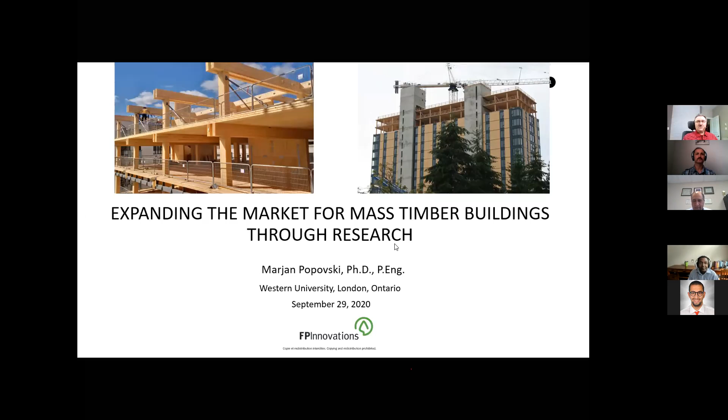Thank you so much for the kind introduction. Good afternoon, everybody. My talk today will be related to expanding the market for mass timber buildings through research. What I will try to do is basically explain what research we are doing related to wood buildings in general at FPInnovations.

First of all, probably all of you are not familiar with FPInnovations. FPInnovations is Canada's Forest Products Research Institute. It's a private non-profit institute that specializes in creation of solutions in support of the Canadian forest sector's global competitiveness. It's a Canadian public-private partnership between the federal government, provinces and territories in Canada, and industry members. We have approximately 450 employees and around 170 industry members. We have 3 main laboratories in Vancouver, Montreal, and Quebec City, and our research budget is around $65 million a year.

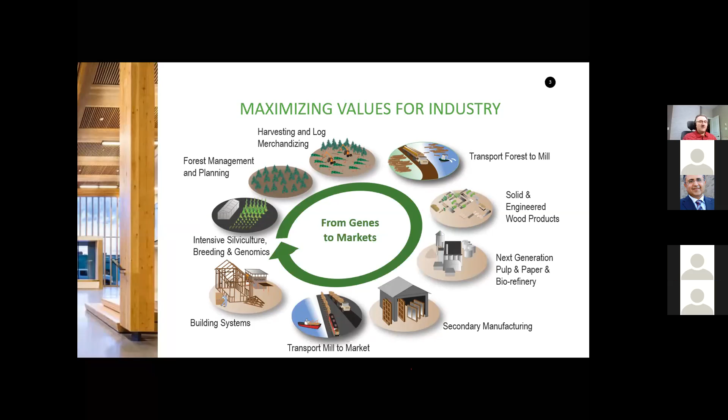We basically provide optimized solutions to maximize the values from the industry, all the way starting from intensive silviculture, then forest managing, to processing, transportation, primary and secondary manufacturing of wood products, all the way to the building systems. Because most of the wood products that are produced end up one way or the other in structures and building systems, that's the group that I am in, the building systems group. We're kind of on the top of the food chain in our organization. We basically do lots of collaborative research and development between government, universities, and industry together.

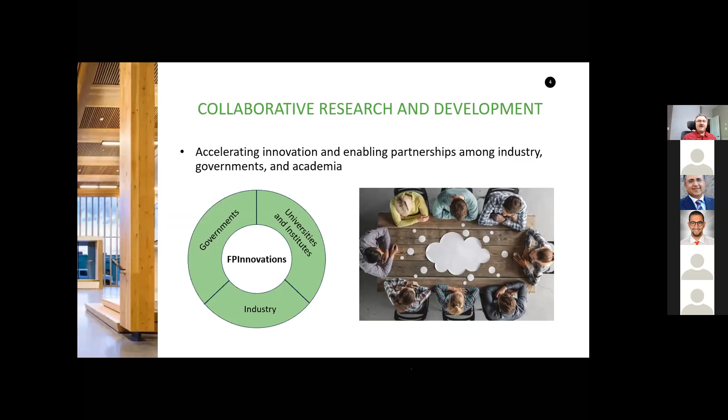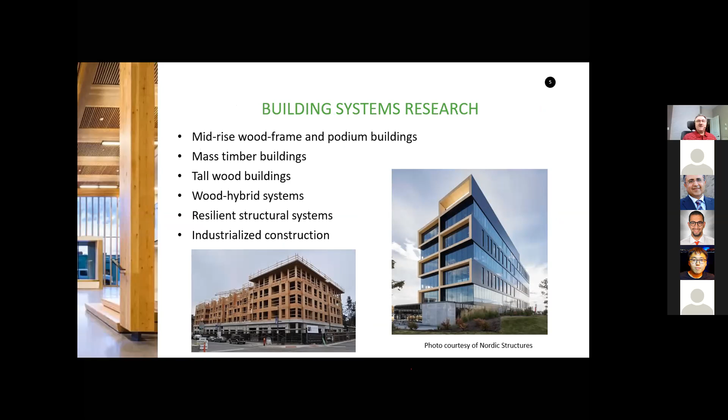In the building systems group, most of the research is related to these main topics: mid-rise wood frame construction on or without podiums, mass timber buildings, tall wood buildings, wood hybrid systems, resilient structural systems, and industrialized construction.

Our group's research follows a multidisciplinary approach. We also take a holistic approach to the solution. So not only does the solution have to be good for structural and seismic performance, but also it has to be good for serviceability performance, for durability and energy efficiency, for fire performance, acoustics, and of course to be a sustainable solution. So we look at the holistic approach when we are doing our research. This might be new to you, but this is probably the only way to go forward, because if we only provide a solution that is only good for structural performance but not good for other performances, then we basically have not done much to introduce that solution in the market and get it accepted in the codes.

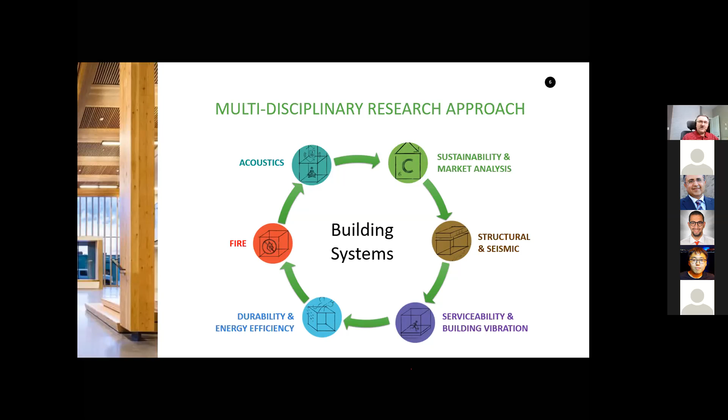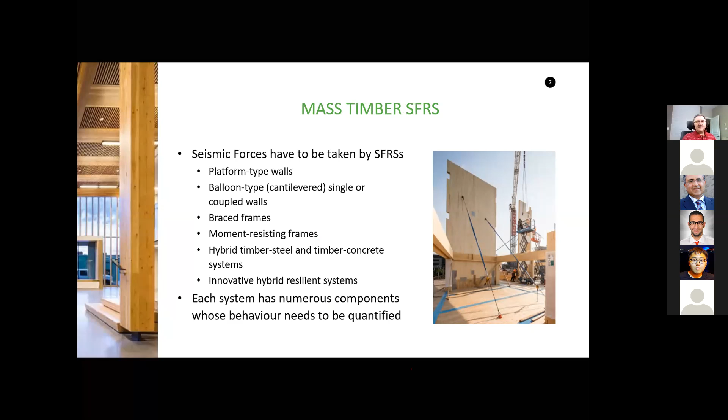So let's start with some of the research that we've done on structural and seismic performance. I'll talk here about mass timber seismic force resisting systems. The seismic forces that are generated on structures have to be taken by the seismic force resisting systems, and we have many such systems in timber structures. For example, platform type mass timber walls, balloon type or cantilevered single or coupled walls, braced timber frames, moment resisting frames, and many different hybrid steel, wood-steel and wood-concrete systems. Finally, we also have innovative hybrid or resilient systems. Each of these systems has numerous components whose behavior needs to be quantified.

So we started our research on mass timber systems, starting with platform type CLT buildings. We did numerous tests, dozens of tests, on 11 different types of CLT walls that can be used in platform type construction. For those not familiar with platform type construction, that's a construction where the height of the wall is basically equal to the story height. You build the walls on the first story, then put the floors on top, then the wall of the second story, then the floor. So the floor at each story serves as a platform for building the next story up.

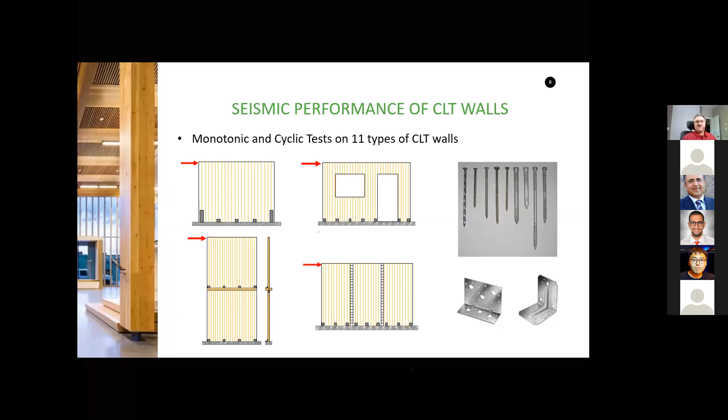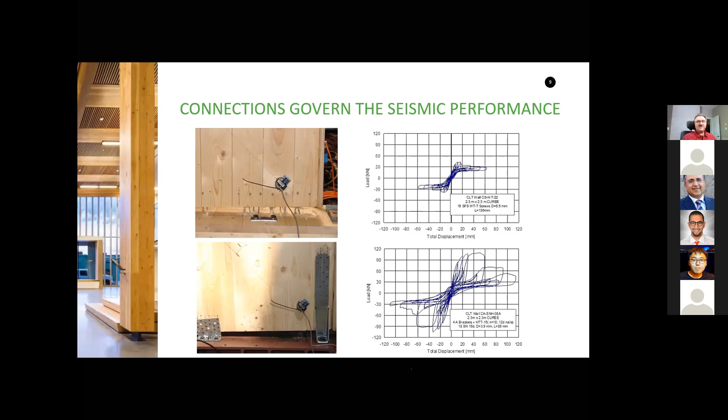What we found out is that connections definitely govern the seismic performance of the walls. For example, if you use a CLT wall with screws connected to the floor below, they can provide a connection with significant stiffness. However, the ductility and energy dissipation of such connection is pretty low. On the other hand, if you use walls with hold downs, the performance of the wall significantly improves in terms of seismic performance and energy dissipation.

We also tested a two-story CLT house, 6 by 4.8 meters in plan. That house was symmetric in one direction and unsymmetric in the other dimension. So we did quasi-static testing in both directions to determine how a 3D structure would perform under lateral loads.

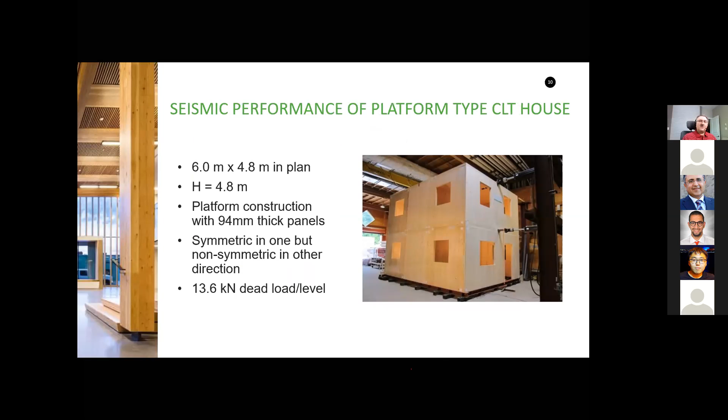And again, lots of findings here—of course every one of these slides could be a presentation on its own. We found that the structure responds with a combination of rocking and sliding deformations. The main deformations were in the lap joints between the CLT panels, in the brackets connecting the walls to the floor, and in the hold downs.

However, the structural integrity was not compromised at failure, and we were able to get up to 3.2% drift at the bottom story. The hysteresis loop on the left shows the performance of the house at the bottom story, and on the right you have the performance of the second floor. As you can see, and as expected, most of the deformation and energy dissipation occurred at the bottom story of the house.

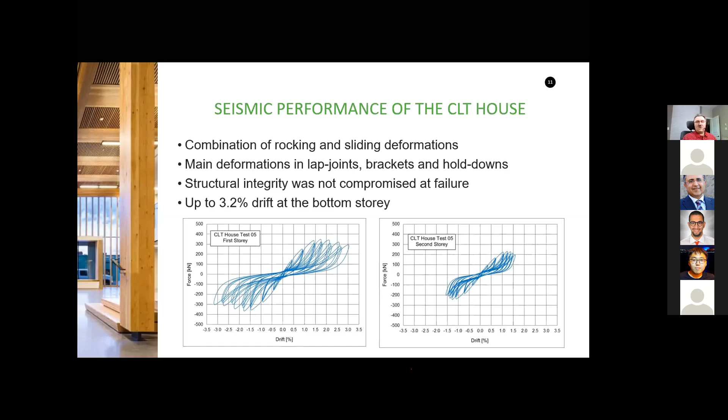The deformation of the CLT house consisted of many different components. We had a global rotation component of the wall on the first and second floor, then a rocking component at each floor, then sliding at each story of the walls, and finally in-plane wall deformation consisting of bending and shear deformation inside the panels themselves.

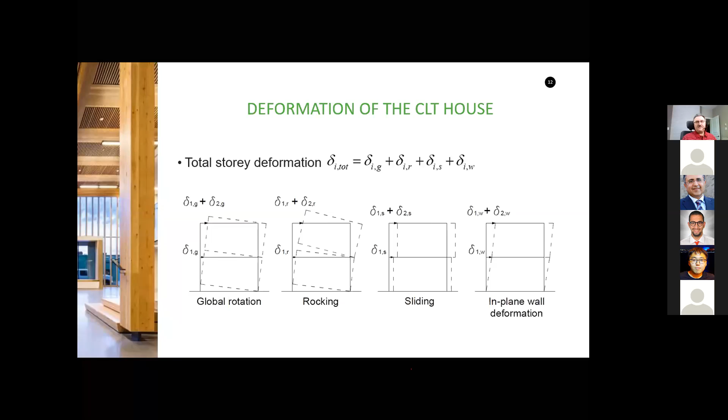Having all of this data from the experimental tests of single walls, the 3D house, and some data available from other researchers, we did a long, comprehensive analytical study to determine the seismic modification factors for platform type CLT buildings for implementation in the National Building Code of Canada, NBCC. So we did the modified FEMA P695 analytical program, done in collaboration with Colorado State University and Texas A&M University.

We developed numerous archetypes for CLT walls in platform type construction with different heights. We also modified the procedure to serve Canadian sites such as Montreal, Vancouver, and Victoria. And of course we chose and scaled different earthquakes coming from 3 different sources: on the West Coast, subduction, crustal, and subcrustal earthquakes, as well as local earthquakes for Montreal.

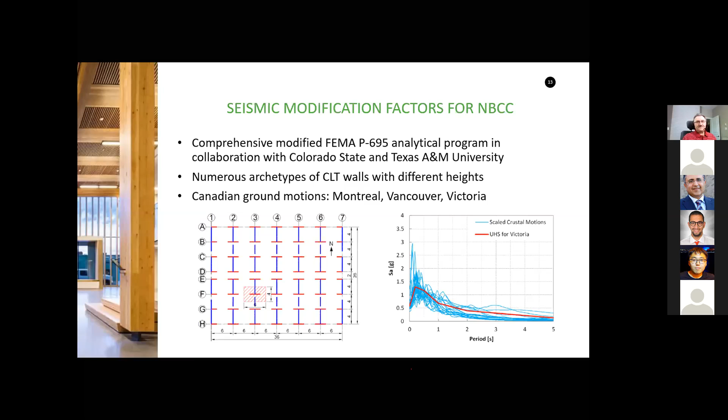And out of all that analysis, which took more than 2 years, we were finally able to introduce platform type CLT walls as a seismic force resisting system in the 2020 National Building Code of Canada, with seismic factors of Rd of 2.0 and Ro of 1.5.

For those not familiar, those R factors quantify the ductility and energy dissipating capability of the wall, of the system. In the National Building Code there's a table with the SFRSs, the seismic force resisting systems, with their R factors for concrete, steel, and wood buildings, as well as masonry buildings.

So we were also able to establish height limits for the system. The height limits are 30 meters for low and moderate seismic zones, and 20 meters in high seismic zones, which will be seismic category 3 and 4 in the 2020 NBCC.

Based on the research that we've done, we also implemented CLT as a system in CSA O86, which is the Canadian standard for engineering design in wood. That was first done in 2016, and then in the 2019 edition we did a significant revision of those clauses based on the research conducted at FPInnovations and other places.

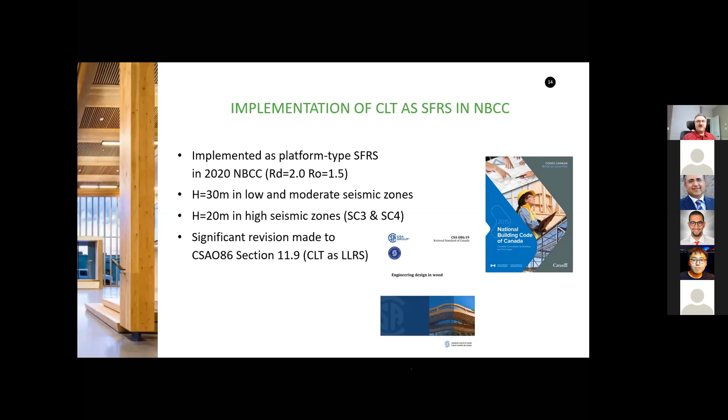Next system we are looking at is brace timber frames. Brace timber frames can be one of the most efficient seismic force resisting systems. They are frequently used in mid-rise and tall buildings because they provide high stiffness for the building. However, the ductility of the brace system can sometimes be limited.

You have examples there of brace frames being used in real buildings, in UBC's Earth Science Building, which is a 4-story building here at University of British Columbia campus, and the 18-story Brumunddal building in Norway.

So what is the reason for this research? As I mentioned already, brace timber frames were included as a seismic force resisting system in NBCC with their R factors. However, we don't specify in our O86 standards how we can achieve those R factors.

So what you see here on this slide is basically part of the table of seismic force resisting systems for brace timber frames in NBCC. You can see here we have braced or moment resisting frames with ductile connections, and we have 2 ductility levels: moderately ductile brace frames and limited ductility brace frames, with RD factors of 2.0 and 1.5 respectively.

However, the NBCC refers the designer to go to CSA O86, which is the wood design standard, on how to design these brace frames for the R factors given in the code. Unfortunately, we don't have those design guidelines. So the idea behind this project was to quantify the seismic performance of brace timber frames and prepare design guidelines for O86.

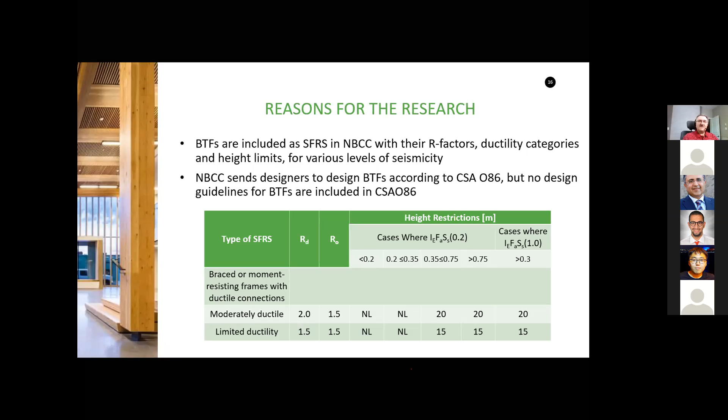We also prepared guidelines on which connection can be used in a brace frame with which RD factor, identifying which connection should be used for moderately ductile and which for limited ductility categories. We also checked the height limits for brace timber frames and which connection can give you which height limit for different types of brace timber frames.

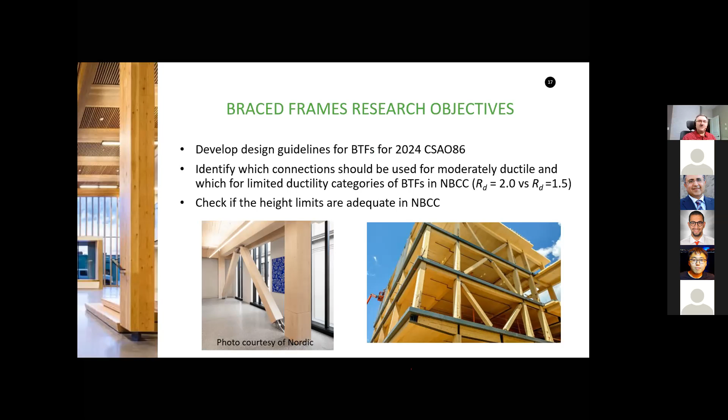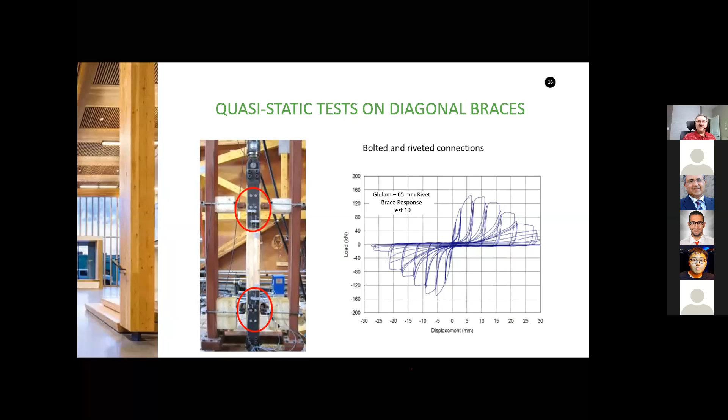Then, having this information, we built numerical models to predict the response. The numerical models of brace timber frames with riveted connections were developed for single-story and multi-story buildings, designed with RD equal 2.0 and RO equal 1.5. We used different building heights and aspect ratios in our analysis.

So you have an example there of a single-story brace frame where it can be used in industrial construction, commercial construction, and so forth, as well as on the right, a multi-story brace frame that can also be in residential and commercial construction.

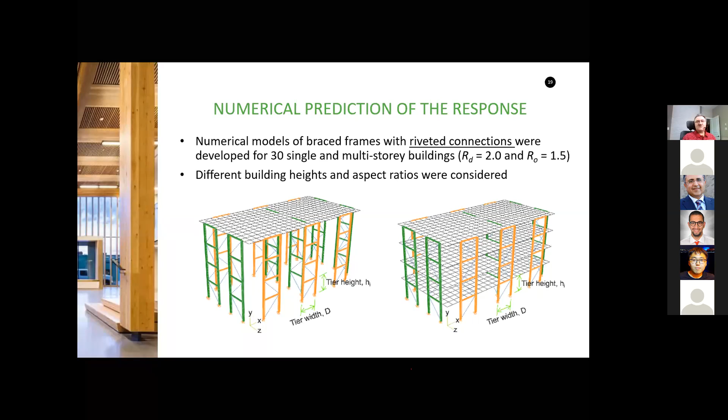We used the 2015 NBCC approach for selecting and scaling of ground motions and for conducting the dynamic analysis. In total, we had 15 earthquake ground motions, 5 earthquakes from each type - crustal, subcrustal, and subduction earthquakes - for locations such as Vancouver, BC.

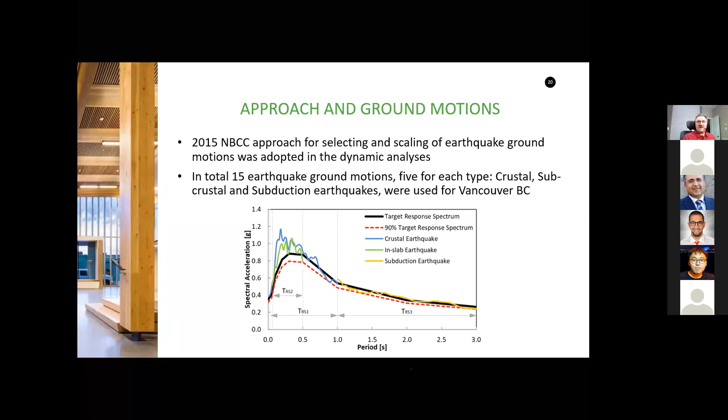Preliminary results told us that basically the RD factor of 2.0 and RO of 1.5 can be appropriate for brace timber frames with riveted connections. Also, the height limit in high seismic zones can be increased from 20 to 30 meters. Again, these are just preliminary analysis. We have another 2 years to go in this project.

We will build a very comprehensive modeling strategy and comprehensive analysis on many different types of brace frames with many different types of connections. That technical information will then go to the Standing Committee on Earthquake Design for either increasing the height limits for brace timber frames, changing some R factors if needed, or adding new brace frame systems with increased RD factors if such solutions are found and proven by the analysis.

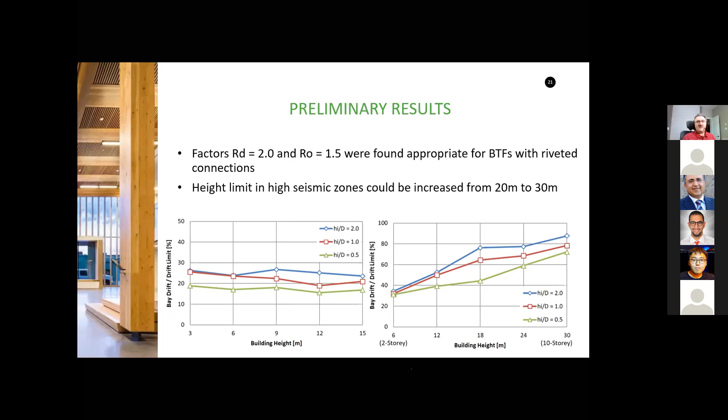Further on, what is important for every system, every seismic force resisting system, is to find the link between the connection ductility, which we call local ductility, and the global ductility or system ductility. So we started doing work in this area as well, starting with very simple brace frames. Basically, you have your brace consisting of the wood part of the brace - stiffness-wise, K brace on the figure - and then you have K of the connections on both sides of the brace.

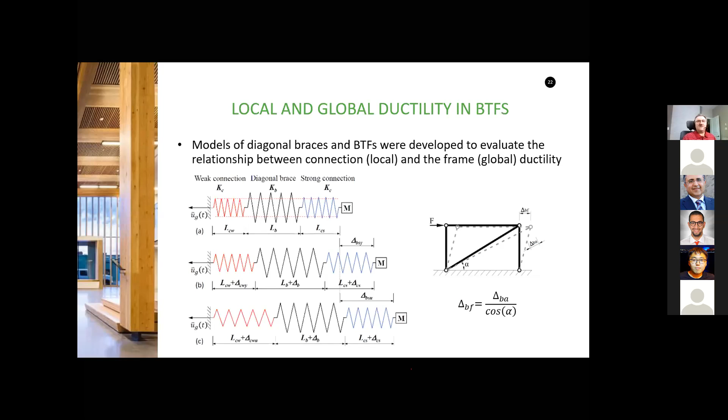You try to establish the relationship between how the connection ductility and performance relates to system performance. After some iterations, we obtained a formula where the relationship between the system ductility, or mu brace frame, is a function of the ductility of connection 1 plus the ductility of connection 2, and also a function of the stiffness ratio between the connection and the axial stiffness of the brace itself.

Once we developed these equations, we did pushover analysis on braced timber frames using numerical models, and we showed that the equations can perfectly predict the system ductility within 5%. So that was pretty good for us.

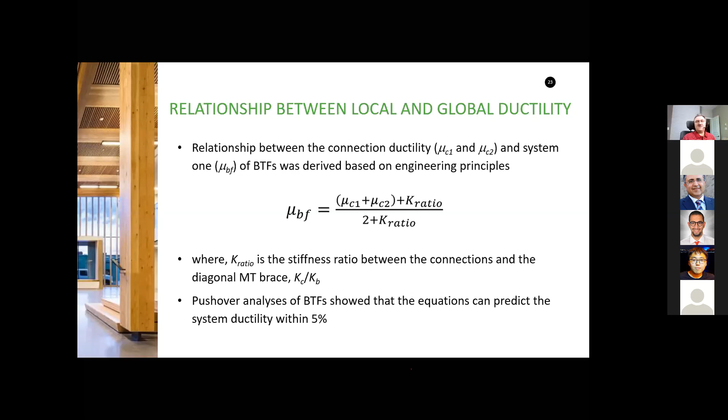We also developed a conservative relationship between the RD factor, as it is in the National Building Code of Canada, and the ductility of the connections and the stiffness of the braces.

We found that in order to obtain a moderately ductile brace frame with an RD factor of 2, we have to have 11.5 ductility in a single connection or 6.3 ductility in both connections. For the RD of 1.5, or limited ductility category brace frames, the single connection should have ductility of 5.4, or both connections should have ductility of 3.2.

Again, these are simplified solutions, and the true relationship between the local ductility at the connection level and the global ductility at the system level can only be determined through a comprehensive nonlinear time history response. And that's what we're going to do. This was just preliminary work to see and feel the problem and choose the spectrum of analysis where we should focus.

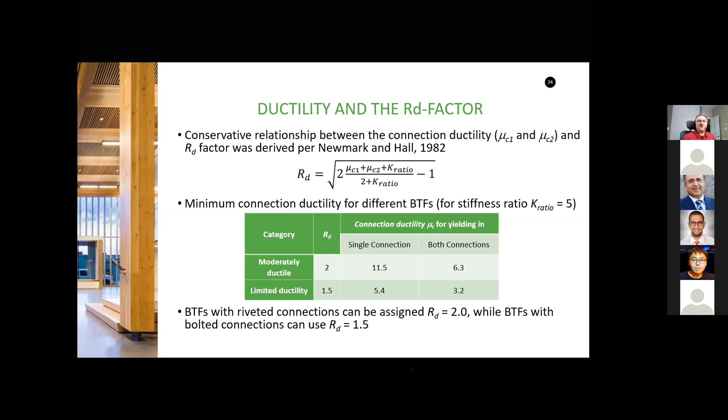The next system I'm going to talk about is balloon mass timber walls. These walls are very similar to reinforced concrete or steel shear walls. Basically, these are walls that go all the way along the height of the building, from the foundation to the top of the building.

They are already being used as an alternative solution in some mid-rise buildings, such as the Origine and Arbora buildings in Quebec. These are 8-story and 13-story CLT buildings. The behavior of these walls is highly influenced by the wall material and the connections at the bottom of the wall. So the goal of this project was to develop the missing information on seismic performance and then codify the system.

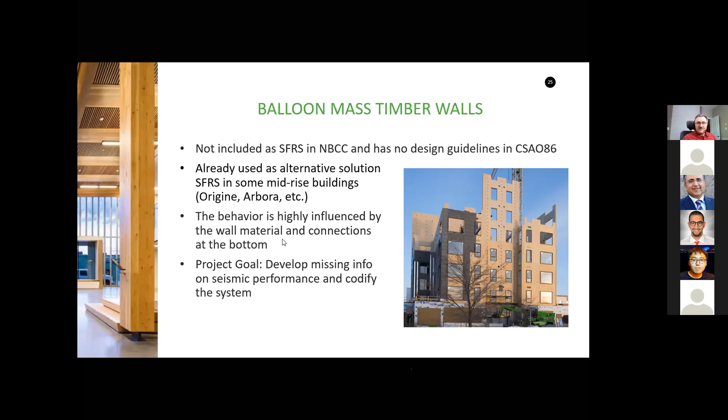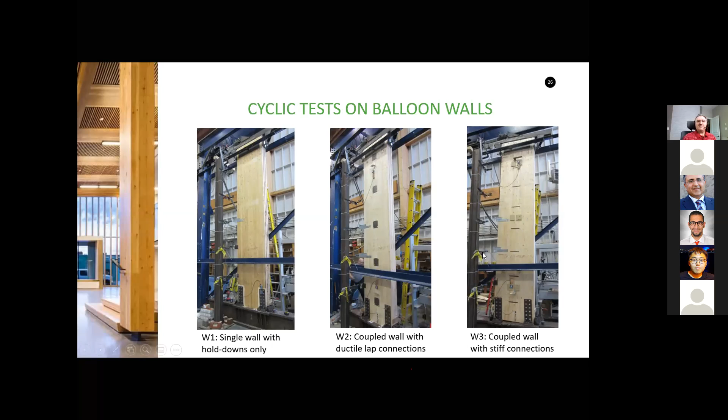Wall number 3 also consists of two panels. It has hold-down connections but also stiff connectors between the walls. We wanted to investigate how these connections between the wall panels along the height would influence the response of the wall.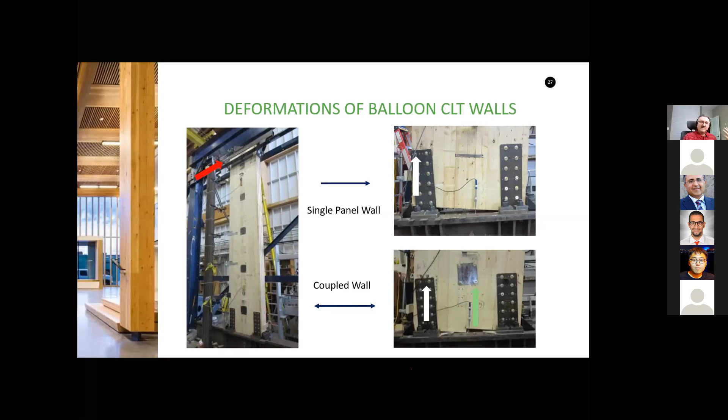What we found out is that, of course, single walls versus coupled walls have different responses, and there are also differences between coupled walls as well. All of these testing programs could be a presentation on their own, but I just wanted to give an overview at this time of our research program.

The research on this project, the same as on the braced timber frames, continues, and the end results are expected to culminate in implementation of this system in the National Building Code of Canada, so that it's really approachable, easily understood, and taken up by designers for real buildings.

We also did some innovative testing on innovative connections to be used in these balloon walls. For example, here you have a connection that has a square opening inside the CLT panel. We have a steel plate inserted in that opening, and that steel plate is connected to the foundation with steel rods on both sides of the CLT panel.

By changing the end distance between the hole and the end of the panel, you can obtain different response of the connection. So we did investigation into these types of connections as well, and we found that different end distances provide different performance levels.

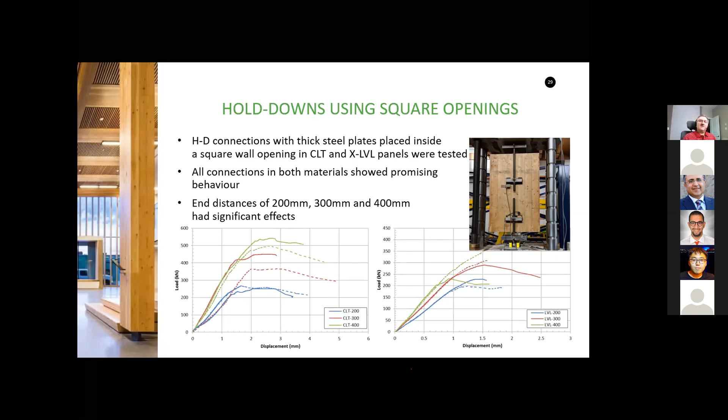On the analytical work, we already developed analytical models based on engineering principles in Mathcad, as a preliminary step, and those models were validated based on the test results. The influence of key parameters on the structural performance of the walls was investigated, such as the pattern of the lateral load on the wall, the vertical load of the walls, the aspect ratio of the panels, and what connections are needed.

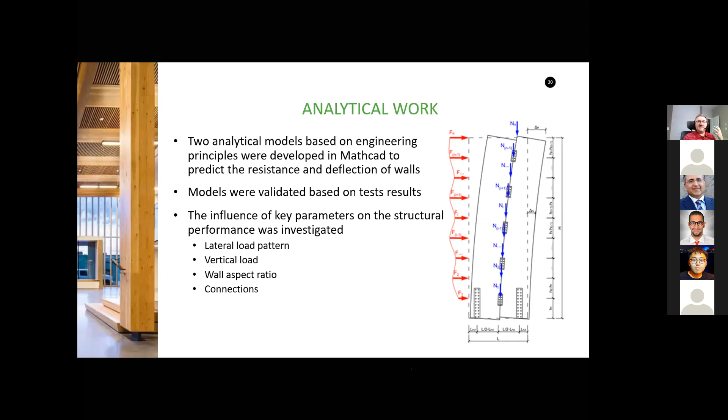So you have many different parameters. Here you have basically a balloon wall that consists of 2 panels, and each panel has a hold down, and you have these splice connections between the panels. This is a completely new system, so not much information is out there. We are kind of like trailblazers, trying to investigate the performance of these systems from scratch.

As I mentioned, the research on balloon walls continues, and the objective is to gather enough technical information within 2 to 3 years for implementation in the National Building Code of Canada.

Some of our research was also related to tall wood demonstration buildings in Canada. For those who are not familiar, in 2013, NRCan, Natural Resources Canada, launched the Tall Wood Buildings initiative. Out of that initiative, 2 tall buildings were built: the 18-story Brock Commons building at the University of British Columbia here in Vancouver, and the 13-story Origine building in Quebec City.

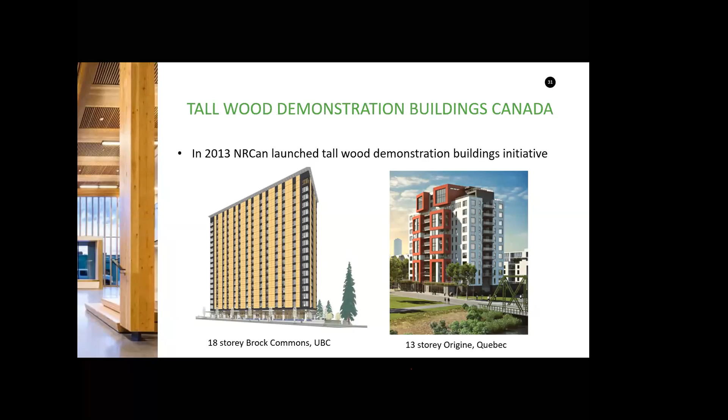The Brock Commons building is a hybrid one. It consists of concrete shafts that take the lateral loads, wind and seismic, while the gravity loads are taken by mass timber floors and mass timber columns.

What was innovative for this vertical load system was that the load from the column above the floor was directly transferred through steel pipes, as you can see, to the column underneath. So the floor doesn't see anything from the force coming from the floor above. The force is transferred directly from the column on the top floor all the way to the column at the bottom floor.

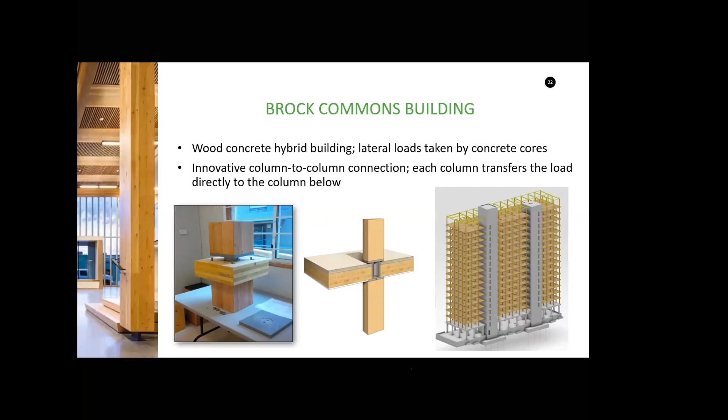This enabled us to position the CLT floors on each column and provide what we call a point-supported floor system. This floor system was first used in this building in the world, because most CLT floor systems before this one used walls with sufficient length as support—you'd have your wall panels, then your floor panel sitting at the top with sufficient length to sit on. But here, your floor panels are only sitting at points in the corners.

This innovative solution was developed by Fast + Epp design engineers from British Columbia, here in Metro Vancouver. What this floor also allows is using the CLT panels for bending not only in one direction, but also in the perpendicular direction, because you're only supported by the 4 corners of the panels, so you have bending in both directions. That was something new that had never been investigated.

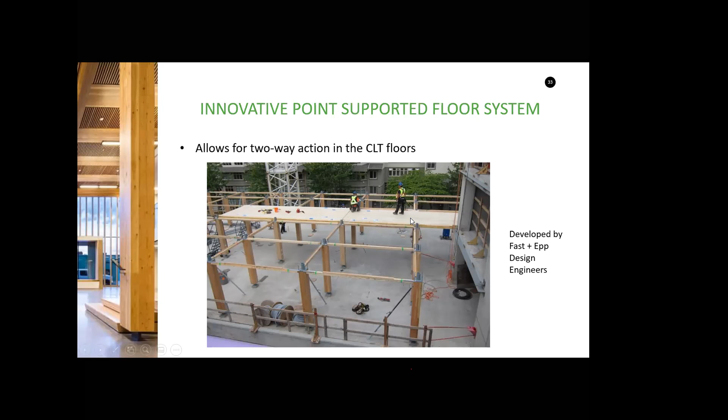We helped the designers for this project by conducting tests in our laboratory on 18 different CLT floor solutions, with different thickness, different number of layers, different thickness of each layer, and so forth—floors with openings, as you can see here for services, and floors without openings. What we obtained is that the panel is not only bending in this direction, but also bending in the perpendicular direction.

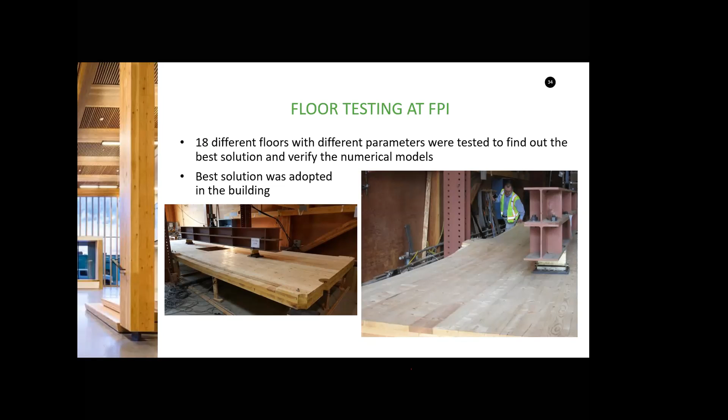Based on our results, we were able to provide the designers for the tall wood building here at UBC with the best solution for the floors, and that solution was implemented in the real building.

I'll now switch a little bit to needs for low damage structural systems.

Those familiar with earthquake engineering and earthquake performance of buildings have realized that life safety alone is not a good enough criterion if it doesn't account for economic losses of the building. Economic losses such as building operation and damage can sometimes be higher than the cost of the building itself. So there's definitely a need for resilient, low-damage structural systems that can reduce damage while offering a higher level of safety to occupants.

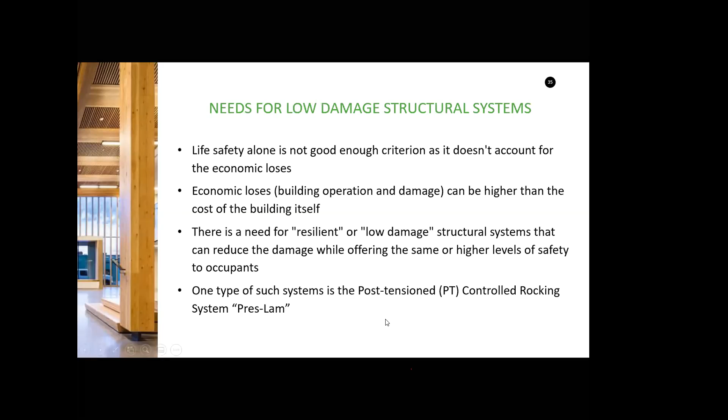One such system is the post-tensioned rocking, controlled rocking wall or frame system called PRES-LAM. This system was developed originally at the University of Canterbury in New Zealand, and it can be implemented in moment resisting frames, shear wall systems, or a combination of those. The main components are mass timber walls, beams and columns, anchored post-tension cables or rods, and energy dissipation devices. FPInnovations has purchased the licensing rights for this system for Canada and the United States.

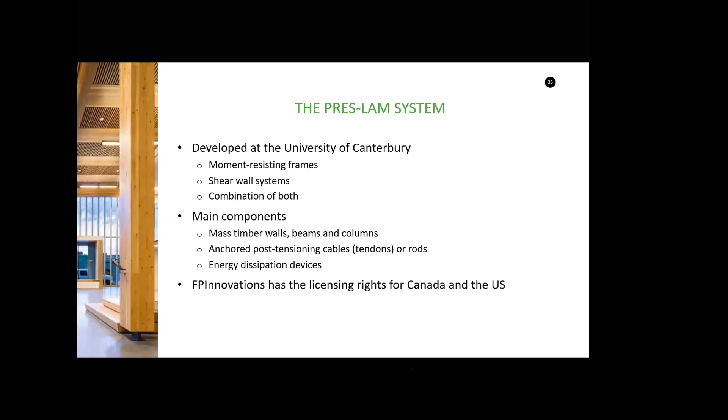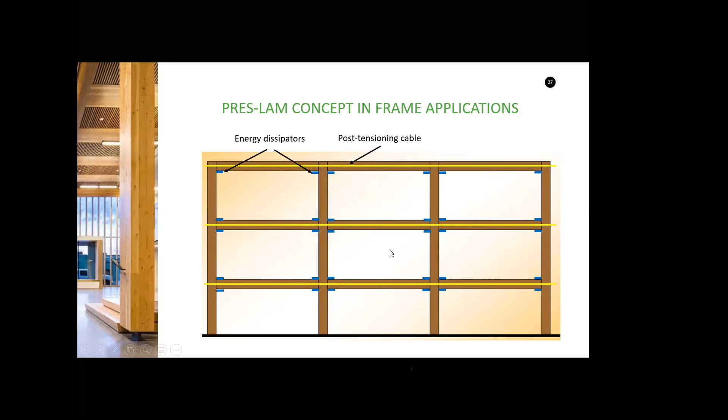Here is an example of the PRES-LAM concept in frame applications. You have moment resisting frames consisting of mass timber columns and beams, and the moment resistance in the joints is obtained by having post-tensioned rods, shown here in yellow. Those rods provide compression at each story, giving moment resistance at each column-to-beam joint. Additional resistance and energy dissipation comes from axial dissipators placed in multiple locations along the structure, and that's how you get energy dissipation.

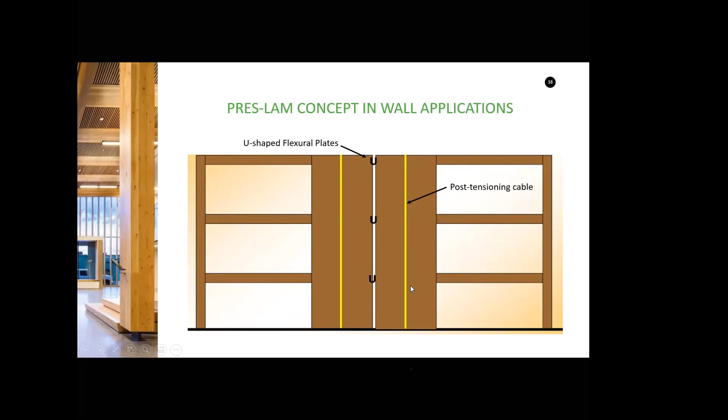In wall applications, you can see mass timber walls again with post-tensioning cables, shown in yellow, and U-shaped flexural plates between the walls. When these walls are subjected to lateral loads, the post-tensioning cable not only provides resistance but also self-centering ability after the earthquake ends, while the dampers provide energy dissipation. The result is a combination of the nonlinear elastic performance of the cables plus the energy dissipation of the dissipators.

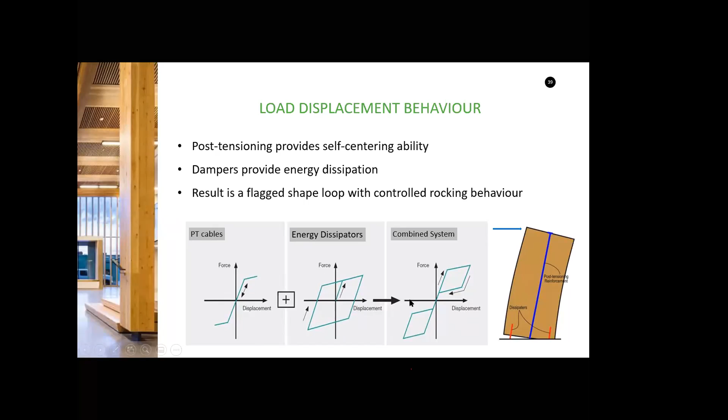And so the combined system can have this type of flag-shaped hysteresis loop.

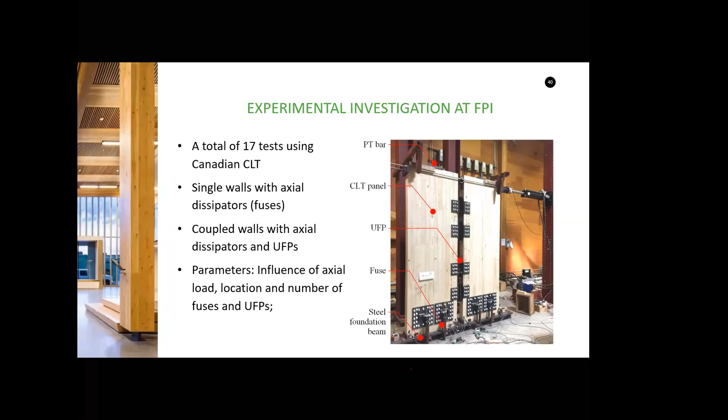We did lots of research on these systems as well. We conducted a total of 17 different tests using Canadian CLT, with single walls with axial dissipators or fuses, or coupled walls, as shown in the slide, with U-shaped flexural plates. We investigated various parameters such as the influence of axial load, location and number of fuses, and so forth. We found that, of course, all of these parameters influence the response.

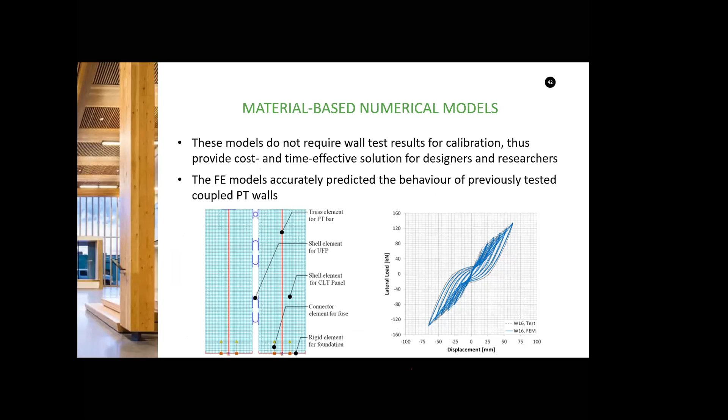Here are some results we obtained from the numerical models. I won't go through the details, but what it shows is that every parameter you change has an influence on the response, and that influence has to be taken into account when considering the behavior of the wall.

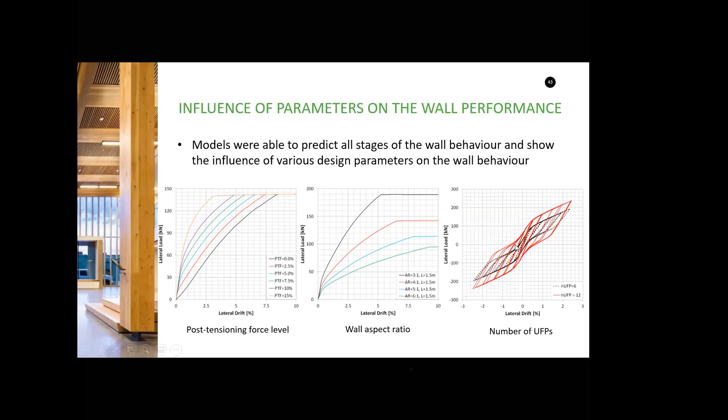We were also part of a consortium of research organizations, universities and institutes that conducted, in 2017, a two-story building test at the shake table at the University of California at San Diego.

This was a post-tensioned rocking wall system, the PRES-LAM system. On the left you can see the two-story building being tested, with two vertical walls and two floors. On the right is a close-up view of the wall, showing two post-tensioning cables on each wall, and UFP plates between the walls. Here is a close-up view of one UFP plate connecting the two walls.

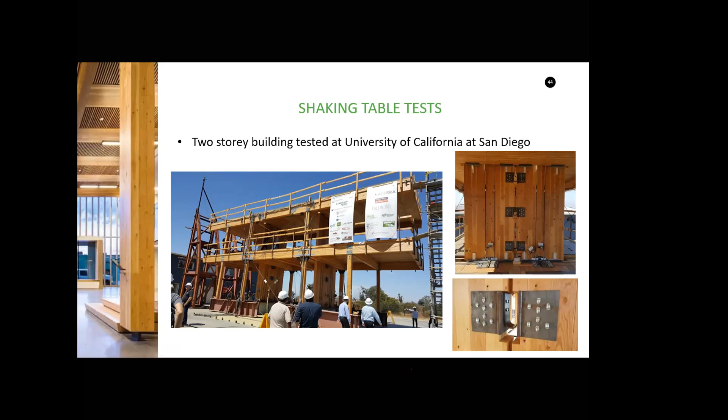The shaking table tests on this building showed that the building suffered no damage at all, across numerous types of shaking table tests. So the building can be used basically after a major earthquake.

We are also part of the continuation of this project. Right now, the design is being worked up for a 10-story PRES-LAM building that will be tested at the same shaking table in San Diego. It was planned for this summer, but due to known reasons we were not able to test it then. It will be conducted next summer, 2021, at the University of California at San Diego. This will be the largest, tallest timber building tested on a shake table in the world, and we're really glad that the consortium of US universities chose this post-tensioning and controlled rocking system as their seismic force resisting system.

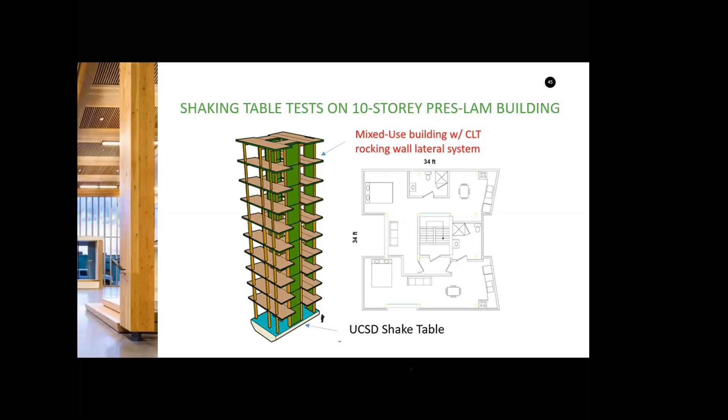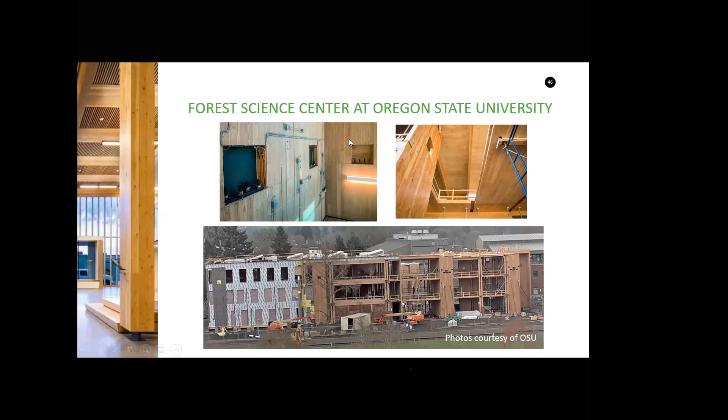The first building that used this system in North America was the Forest Science Center at Oregon State University. Here you have some construction photos of that building. You can see the end of the post-tensioning cables and the steel plate at the end of these cables, same here, and you have a photo of the building under construction. That building is now completed and it's really a magnificent building.

My plan was to visit this building in March. However, due to the COVID situation, I had to cancel my trip.

As I mentioned, we collaborate with many universities, and I'm pleased to mention we had a very successful collaboration with Western University. We have a five-year joint research project between Western University and FPI to take advantage of their amazing wind tunnel facilities, with a very gifted PhD candidate, Matiyas Bezabeh. He probably presented his research already to the faculty and staff. Matiyas, led by Girma and Solomon from UBC Okanagan, did amazing work.

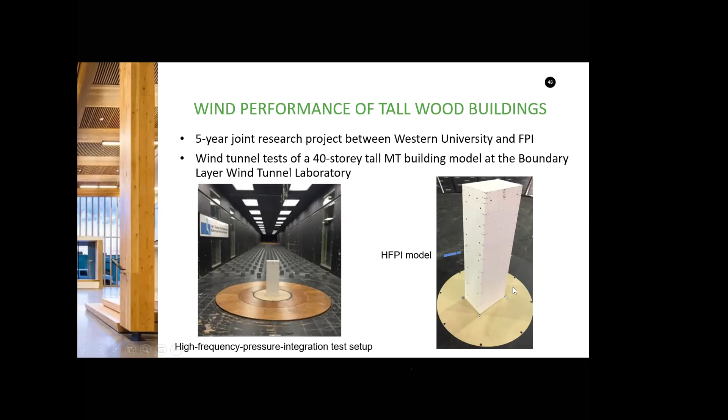For the first time in the world, they did wind tunnel tests on a 40-story tall mass timber building at the boundary layer wind tunnel laboratory, using a high frequency pressure integration test setup. You see the HFPI model on the right here. They also did wind tunnel testing of the 18-story Brock Commons building built in Vancouver, the tall building I talked about, and investigated the surroundings of that building. From an aerial view, here is the building and the buildings around it, so they built a model in the wind tunnel of the building itself and its surroundings.

They've done tremendous analytical research as well. Again, this is breakthrough research, first in the world, that quantifies the wind performance of tall wood buildings. The results from this study will be very beneficial not only to designers but to researchers in tall wood buildings as well. So thanks again, Matiyas, Girma, and Solomon for this wonderful collaboration.

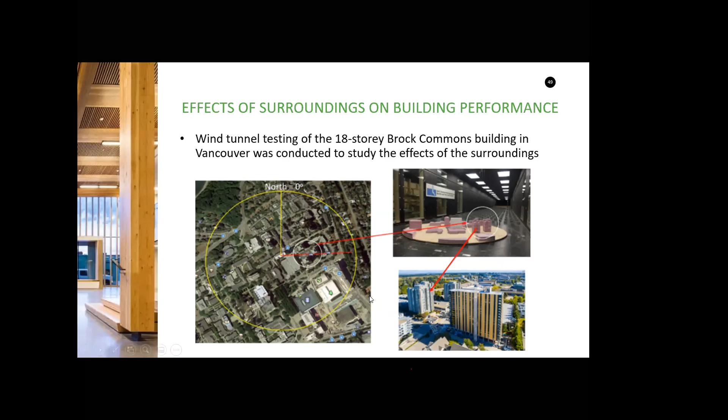With Solomon Tesfamariam from UBC Okanagan and Matiyas Bezabeh again, we were able to develop an innovative steel-CLT hybrid system with innovative connections, defining the energy-based damage indexes for these types of buildings. We also developed force- and performance-based design guidelines for this system. Basically, the system consists of a steel moment-resisting frame, not a high-ductility steel frame but a lower-ductility one. In the bays of that steel frame we inserted CLT panels with connections that can dissipate energy around the perimeter of the panel. By changing the gap of that connection and its properties, we were able to change the force and deformation properties of the system.

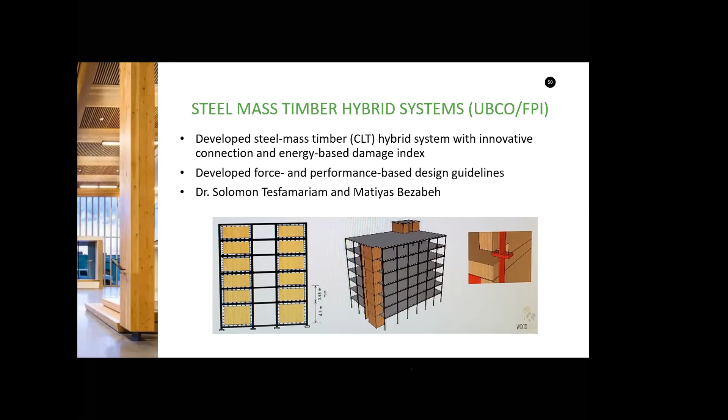With UBC here in Vancouver, we also worked with Dr. Tanner to address the issue of disproportionate collapse in mass timber buildings. There's lots of research on this topic in concrete and steel buildings, but unfortunately not much has been done in mass timber and wood buildings in general. So this research was very beneficial for designers and researchers in this area.

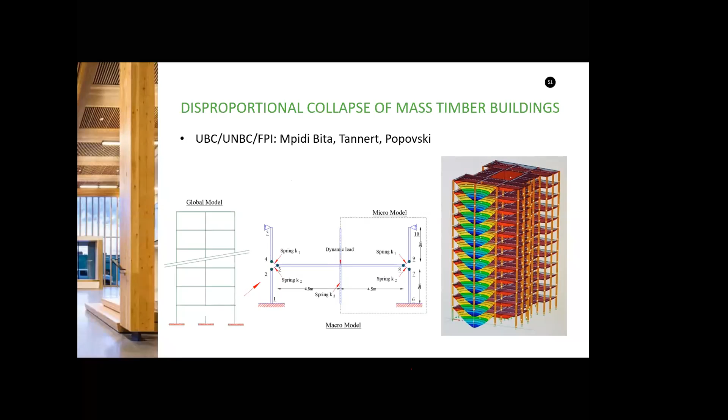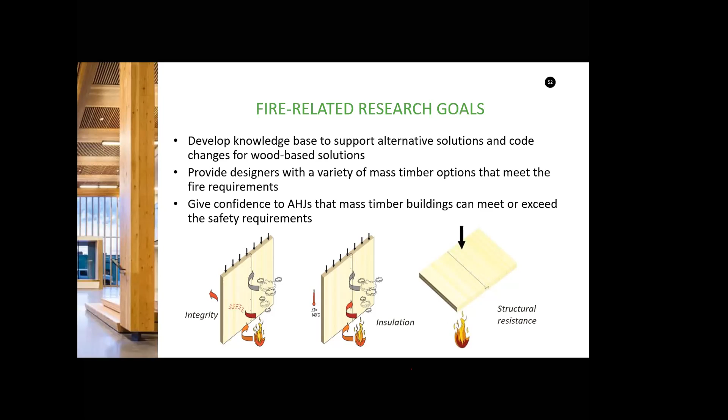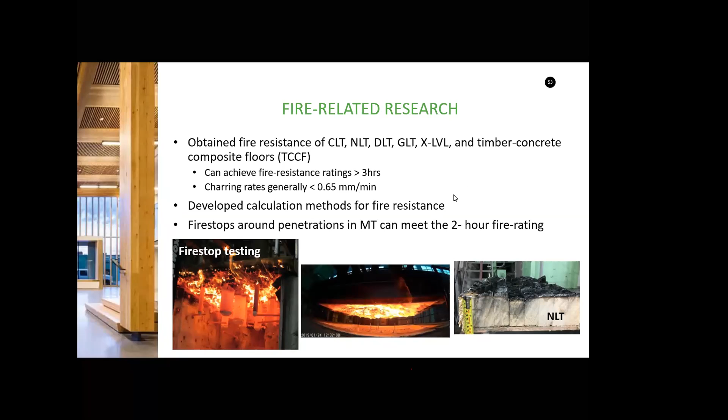In the fire-related research, we also improved the fire performance on many mass timber products by using encapsulation methods, applying gypsum boards. We also did research on fire spread in voids and in mechanically laminated timbers. We did fire testing on different adhesives that can make the CLT products, so that this product can meet the requirements of the PRG 320, which is the CLT material standard.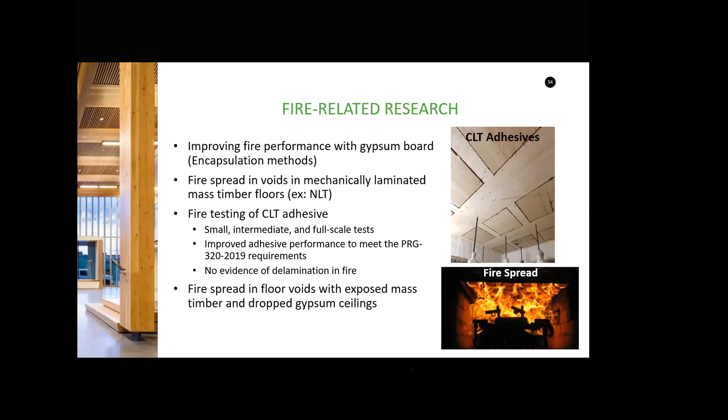And we also did research on the fire spread in the floor voids with exposed mass timber and dropped gypsum ceilings.

Another aspect of research in our holistic approach is the floor vibration and noise control. Again, you can provide a perfect structural solution, but if that solution doesn't meet the criteria for floor vibration or the noise control of the building, you haven't done anything, right? So you don't want to disturb your grandma while reading while you walk on your floor.

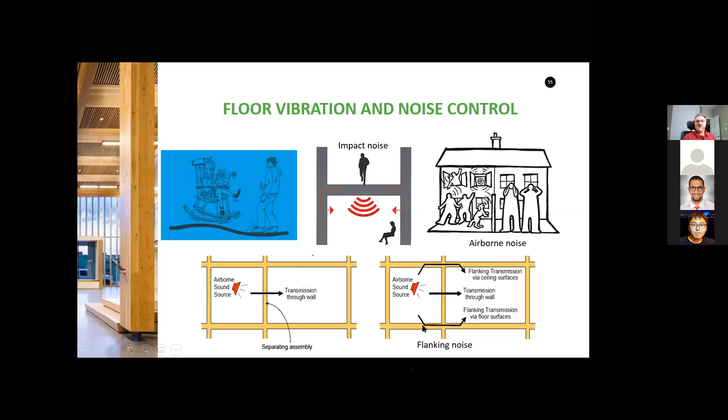Just as information, the noise in a building can come from two main sources: impact noise, as given here in the figure, or airborne noise, either from inside or outside the building. That airborne noise can then be transmitted through the walls to the nearby part of the building or nearby room, or can be transmitted through what we call flanking, by using the ceiling or the floors from the story above and below.

So we developed a new method for determining the CLT floor vibration and implemented that method in CSA O86, which is the engineering design standard for Canada. Now we are working on extending the O86 CLT floor design method to include a broad range of other mass timber floor slabs. We will also consider concrete topping, multi-span continuity, and different floor support conditions.

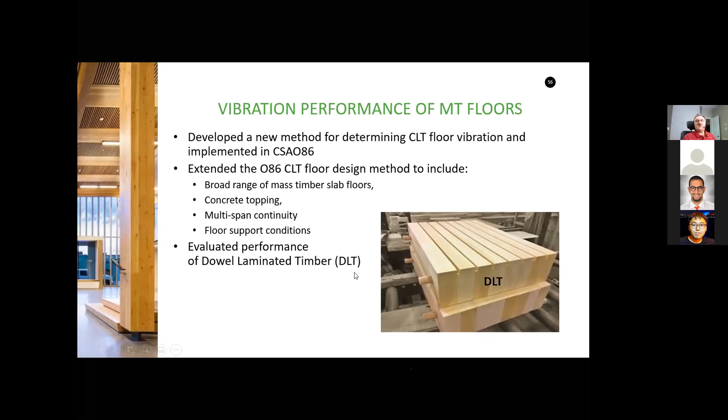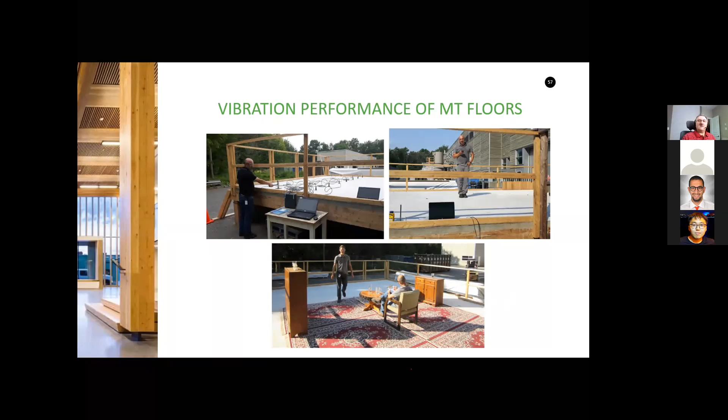We also evaluated the performance of dowel laminated timber, or DLT, as you can see in the figure here. This evaluation of floor performance can be done in many different ways. Of course, you can use sophisticated measurements, instruments and accelerometers and so forth. But you can also do low-tech but very useful tests, like somebody walking or jumping on your floor, while somebody else is sitting, basically seeing the comfort zone of the person inside that room, and how is the feeling of a real person for those floor vibrations.

We monitored the Brock Commons building, and we measured not only the building but also the floor vibration of this building while it was being built during construction and after construction. So we determined the mode shapes of the building, and here we are on site during the construction measuring the floor vibration of that building.

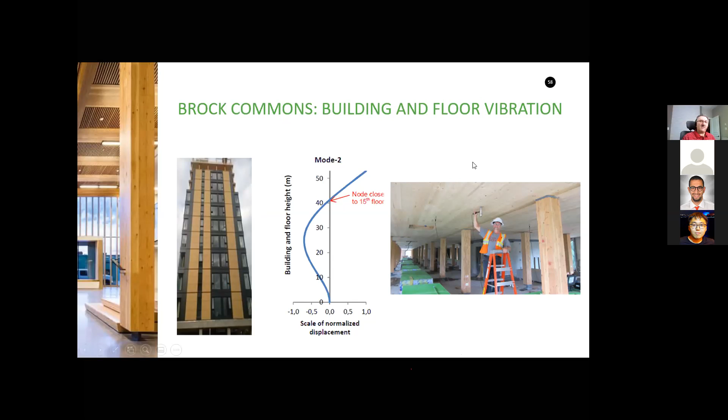In terms of acoustics as well, acoustics in the codes is usually characterized by two parameters: impact insulation class, or IIC, and airborne sound insulation performance measured by apparent sound transmission class, or ASTC. In our research, we developed different solutions for different mass timber products, with concrete topping and without concrete topping. We provided these numbers because the IIC and the ASTC numbers are used in the code to determine which solution for the floor is acceptable and which is not.

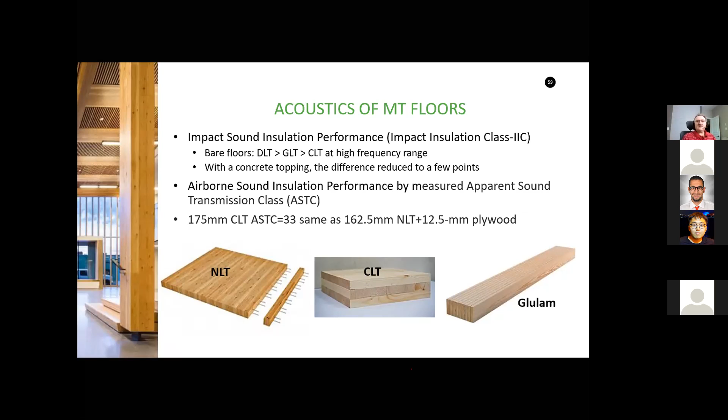So there's a minimum IIC class and ASTC class that the floor has to have in order to be permitted to be built in the building.

Also, we monitor wetting and drying performance of different wood products. For example, we are monitoring the 29.5 meter high Wood Innovation Center in Prince George, BC. What we found is that the wood moisture content changed from 13% during construction to 5% in service during the winter. The glulam columns and CLT walls showed minimal shortening due to change in moisture content. And the roofs with built-in interior ventilation were able to really dry fast the wetted parts of the building. We are also monitoring the moisture content of the floors at the UBC Brock Commons building.

What we found is that the CLT floors stayed below 18% moisture content before the topping was installed. So you can see here the moisture content at each floor of this 18-story building.

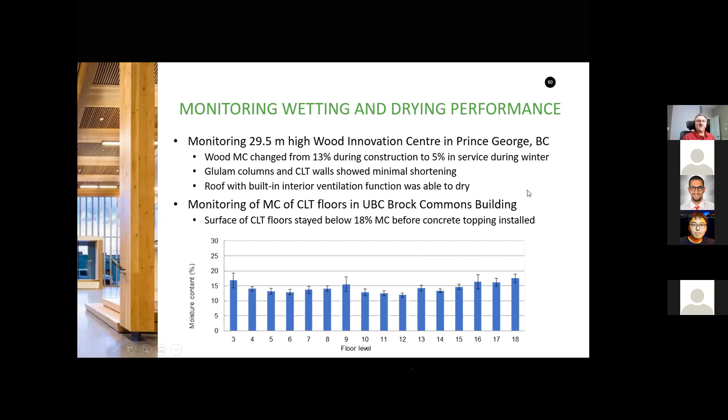We also did testing on on-site protection measures to protect the wood products from water. What we found is that water penetrates slowly from wide surfaces on the products. Exposed end grain is very susceptible to moisture absorption and penetration, and end grain sealer was found to be very effective. Wet concrete topping did not cause considerable wetting on the product, and timber should be kept dry before and after installing any covering material, including the fire protection.

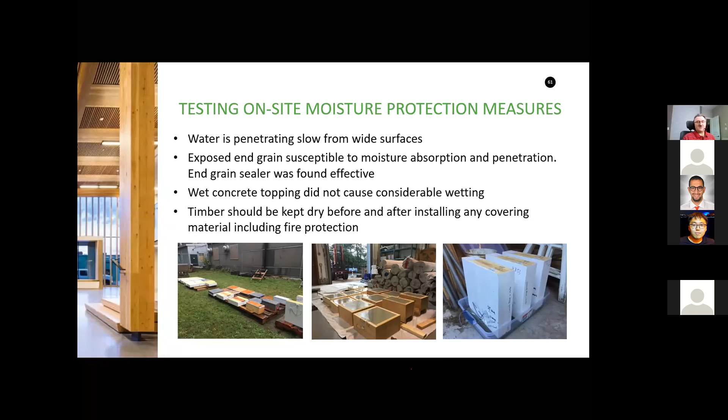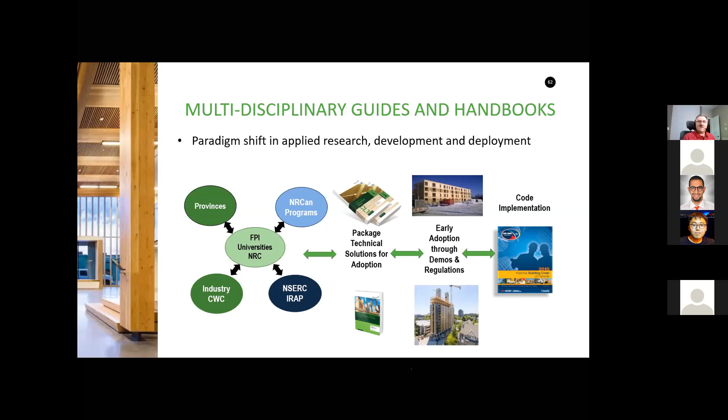Finally, we prepared at FPInnovations several multidisciplinary guides and handbooks, and those handbooks, I have to say, created a paradigm shift in applied research, development, and deployment of wood buildings in general. We developed these handbooks and guides collaborating with universities, with National Research Council, with provinces, NRCan, the industry, and NSERC as well.

We also developed a timber concrete composite floor guide. This guide was published in February 2020. The technical information in this guide will form the basis for implementation of new criteria for these floors in the Canadian standard for wood.

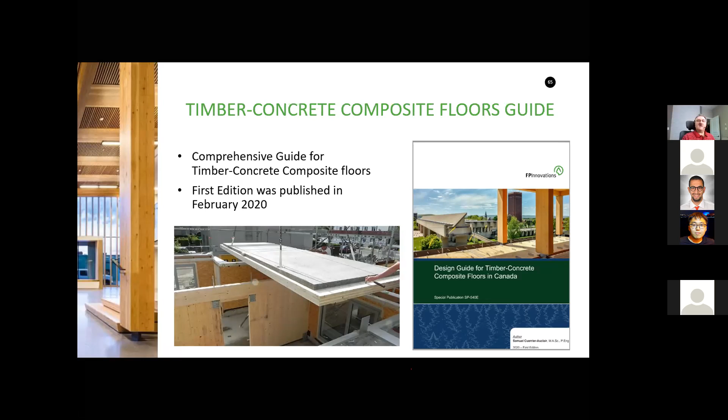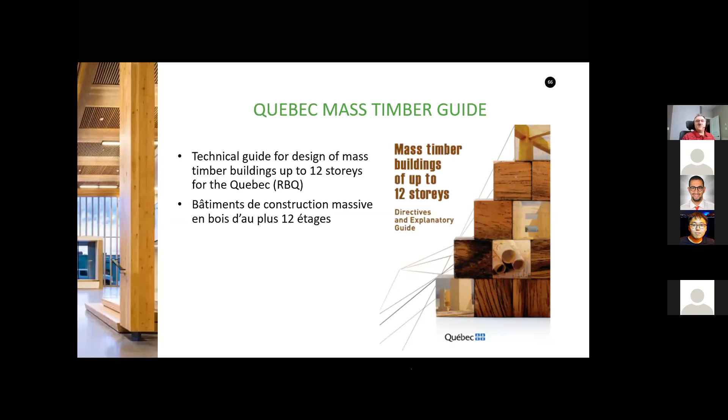Finally, we also published a technical guide for mass timber buildings up to 12 stories for Quebec. This was a tremendous help for the designers in Quebec and the authorities having jurisdiction to accept these buildings being built up to 12 stories in Quebec.

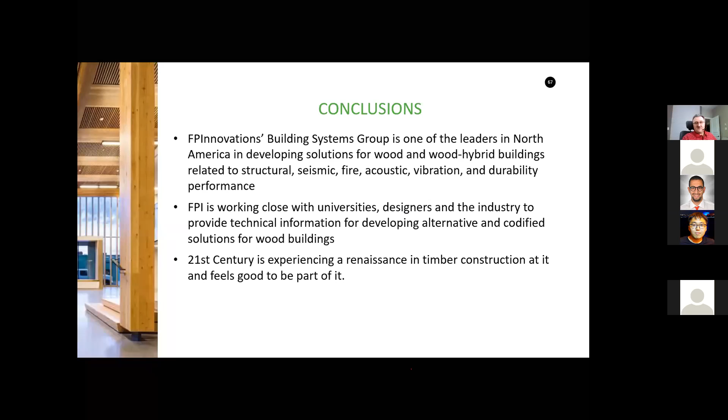As a conclusion, FPInnovations Building Systems Group is one of the leaders in North America in developing solutions for wood and wood hybrid buildings related to structural, seismic, fire, acoustic, vibration, and durability performance. We work closely with universities, designers, and industry to provide technical information for developing alternative and codified solutions for wood buildings. The 21st century is really experiencing a renaissance in timber construction, and it feels good to be part of it as an organization and as an individual myself.

With that, thank you so much for your kind attendance, and any questions that you have are welcome. Thank you.